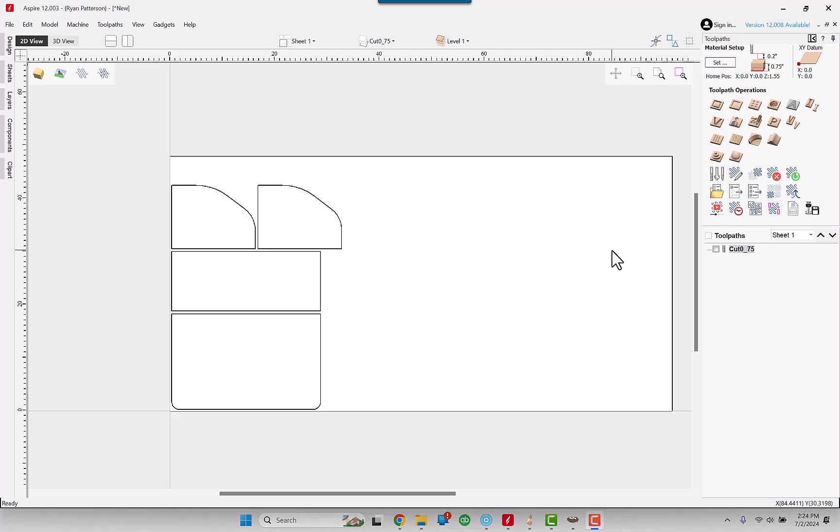This is part 2 of drawing a microwave cabinet parts in Aspire or VCarvePro. Once the parts are drawn, we're going to export each part out separately so it can be imported into an existing nest in PartNester, to include the custom parts we designed in VCarvePro or Aspire.

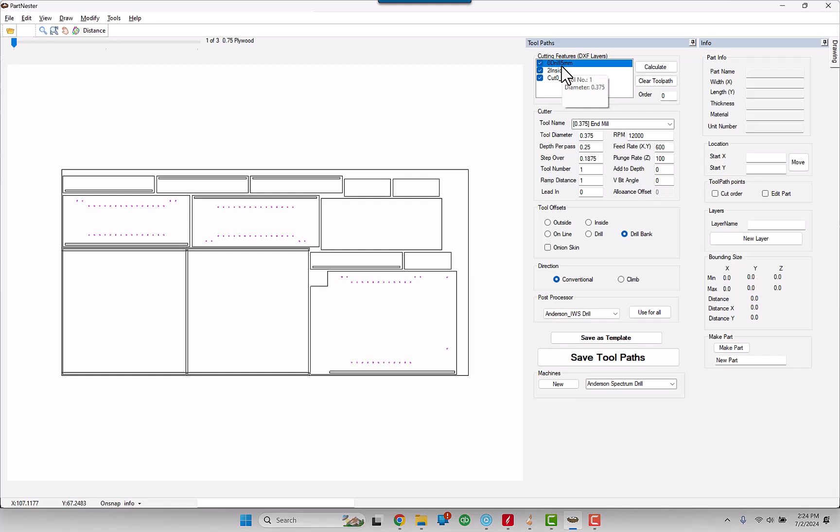First we want to understand our cutting features in PartNester. Currently we have a cut layer, which is cut 0.75, a dado layer or feature, and also some holes. Our microwave cabinet is only doing perimeter cuts, and we want to have those included on this same 3/4 inch plywood, so the naming of our DXF layers is critical to have everything combined together.

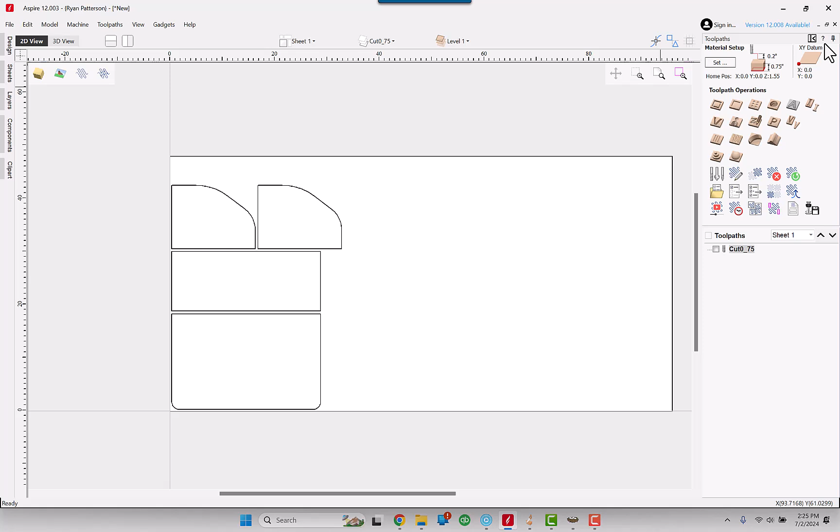We've already set that up to be cut 0.75 in creating our parts, as we can see on our layers tab. Within Aspire or VCarvePro, we have the same layer name and all these parts put on those layers.

So now we just need to save out each part separately as its own DXF, and I'm also going to move each part down into a 0,0 location. This was the bottom. I'm going to use the move selected vectors, set it to an absolute position of the lower left of that part, setting the X and Y to be at 0,0. We'll apply. That part is now located at 0,0.

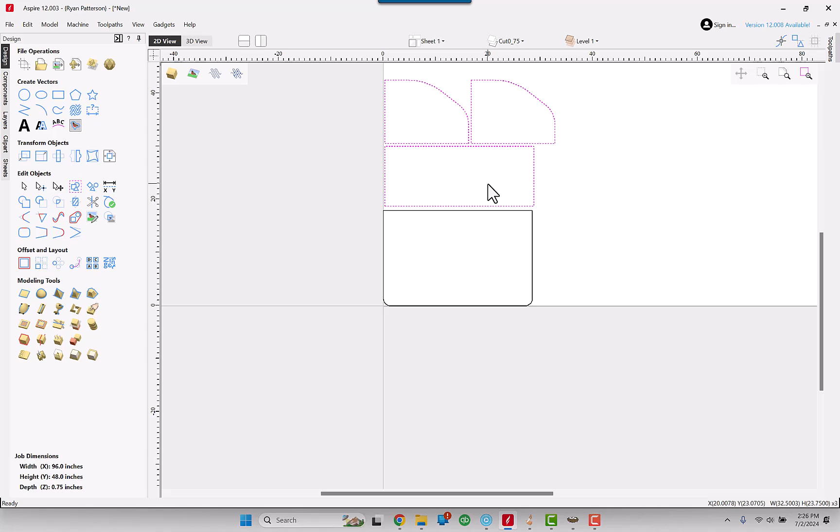Selecting the other remaining parts, I'll do a Control X to exclude those from this save, cutting them and putting them on the clipboard. Now going into File, selecting the part, going into File, Export DXF. I'm going to put those on my desktop inside of a folder named Cabinet Parts, and call that Micro Bottom, and save. That part is now done and saved.

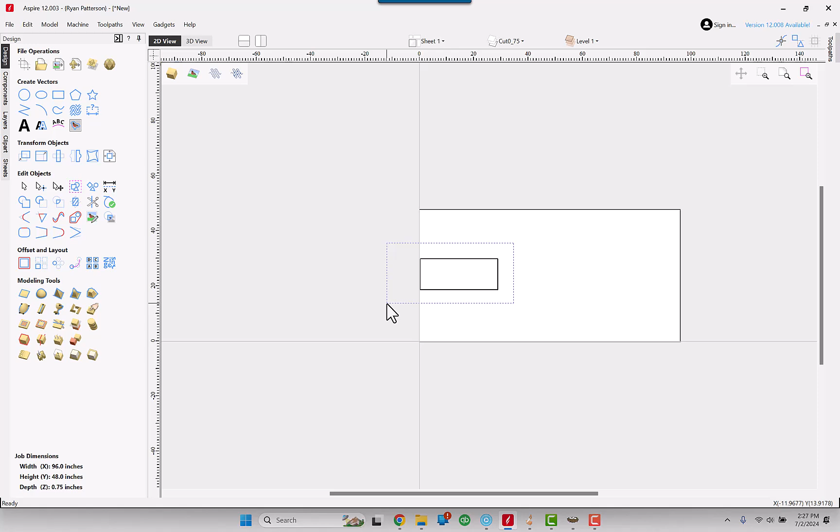I'm going to delete that and then do a Control V, which is going to paste in those other parts. Again, selecting the two sides and doing a Control X to cut, moving that part to 0,0. Apply. This is the back, so I will go File, Export DXF.

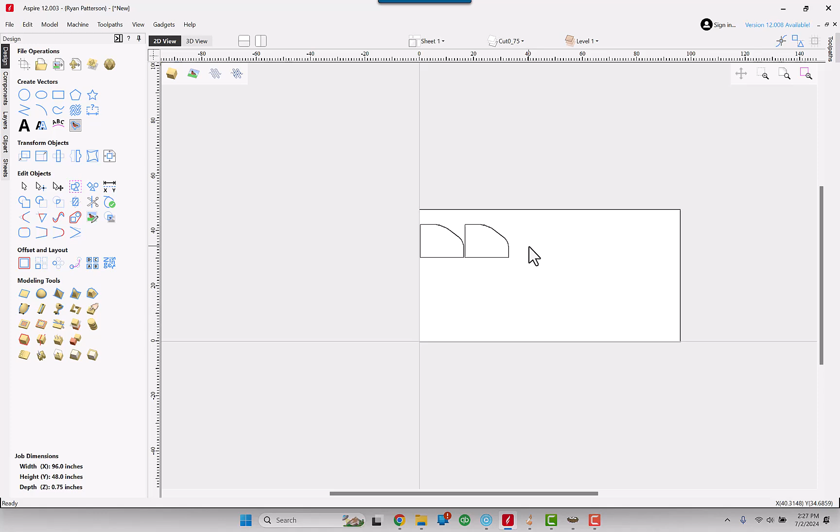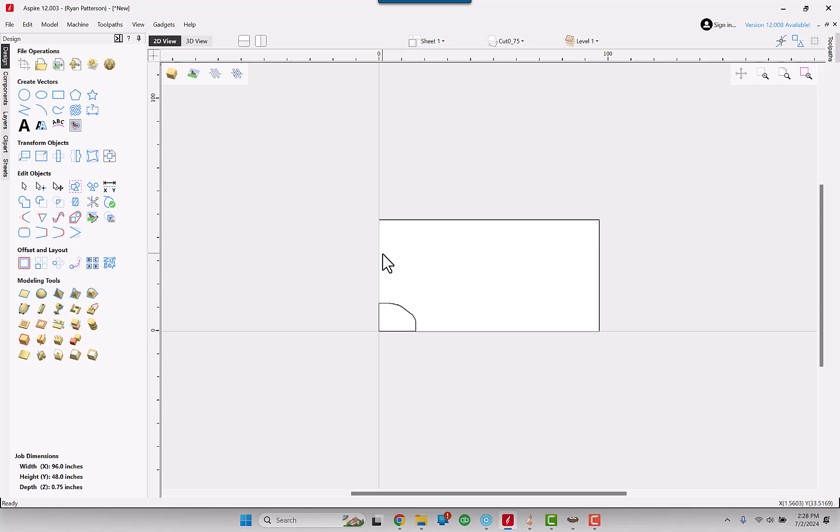Then do a Control V to paste that back in, and again moving this down to 0,0. With that selected, File, Export DXF. Call that micro right side.

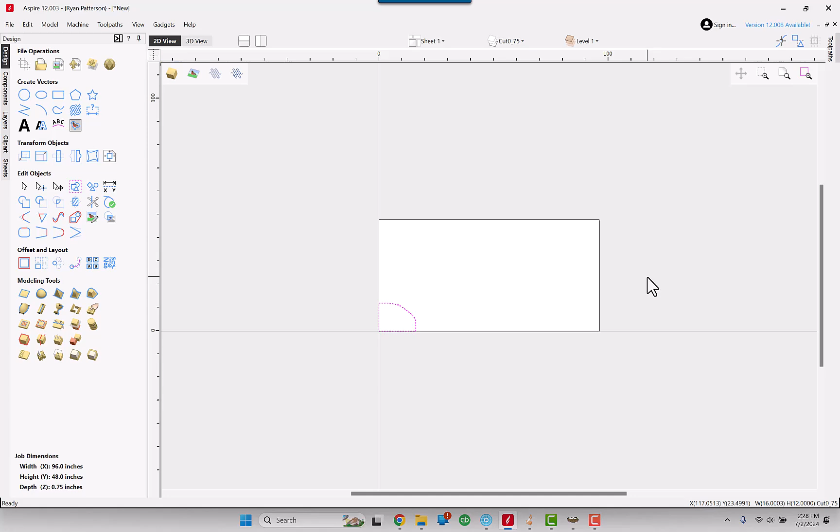The left side in this case is exactly the same thing, but I do want to have two parts that we're able to bring in, so I'm going to just do an export of that same part again. We now have 4 parts saved out as a DXF separately.

We'll now come over into PartNester and select to go open. Going to the desktop, there is the Cabinet Parts folder, using the drop down here to select DXF. Holding the control key down, I'm going to select all of the files I want included within this job. Once they are selected, I'll go ahead and select Open.

We are now presented with needing to know what is the perimeter layer, what is the cutout layer. I'm going to use this drop down box, and there is the Cut0_75. I'll set that, and we can see the layer name is here, and it now needs to know how deep we want to have this cut. I'll enter in 0.75, select OK. That number is now going to be saved and remembered for the next time we want to use it.

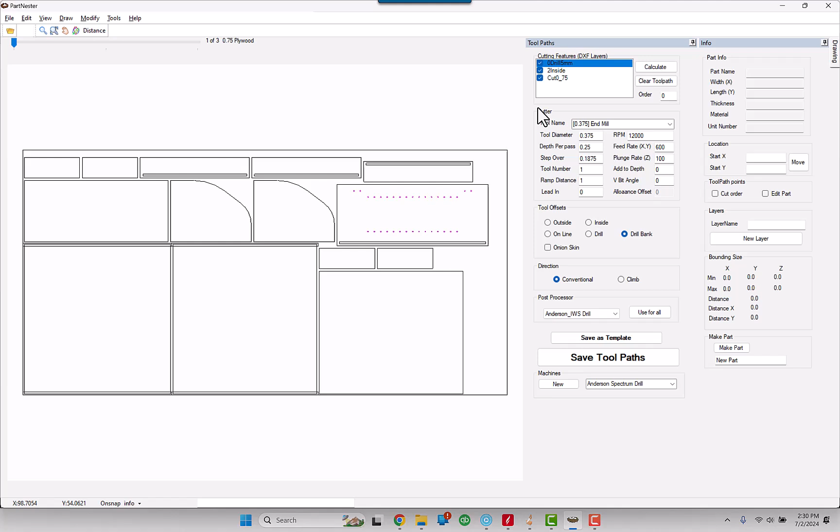The parts themselves have not yet been included in the nest, but once we go to Tools, Nest, those parts are now incorporated within the job of PartNester and will be toolpathed along with all the other parts. Notice that there are the sides. Selecting the cut layer, they become selected just as all the other perimeters do. We could then just either calculate or save out the toolpaths for cutting. If we go ahead and calculate, we will see that they are now included and will be calculated into the job as if it was any other part.